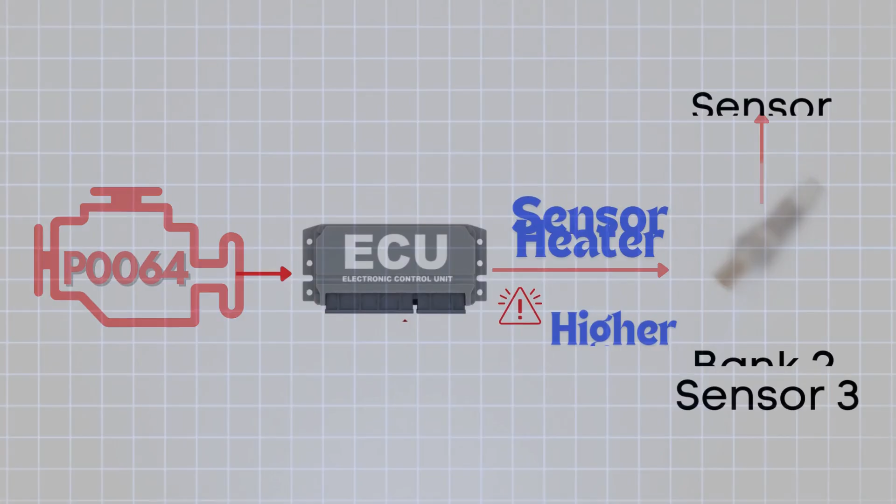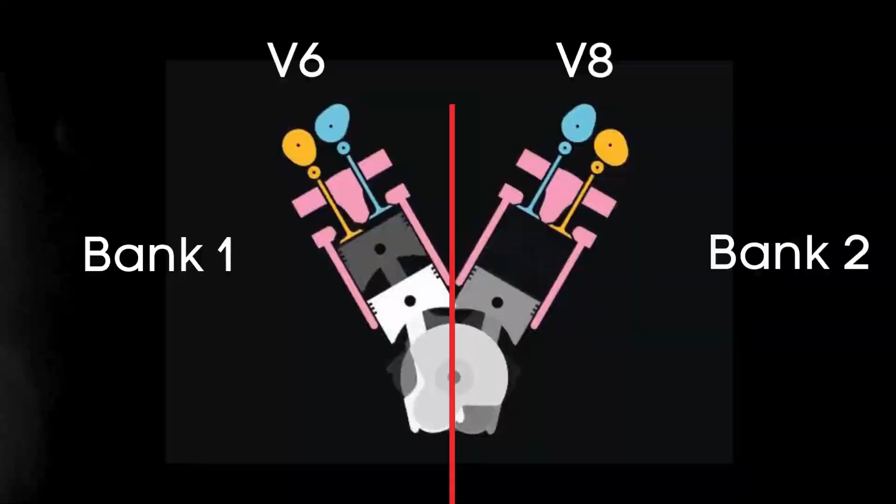Specifically, we're talking about the oxygen sensor heater circuit for Bank 2, Sensor 3. Now let's learn what Bank 2 Sensor 3 is. In engines with multiple cylinder banks, like V6 or V8 engines, you'll have two sides or banks of cylinders. Bank 1 typically refers to the side of the engine where cylinder 1 is located, and Bank 2 is on the opposite side. Each bank has its own exhaust line, and each exhaust line is equipped with its own catalytic converter.

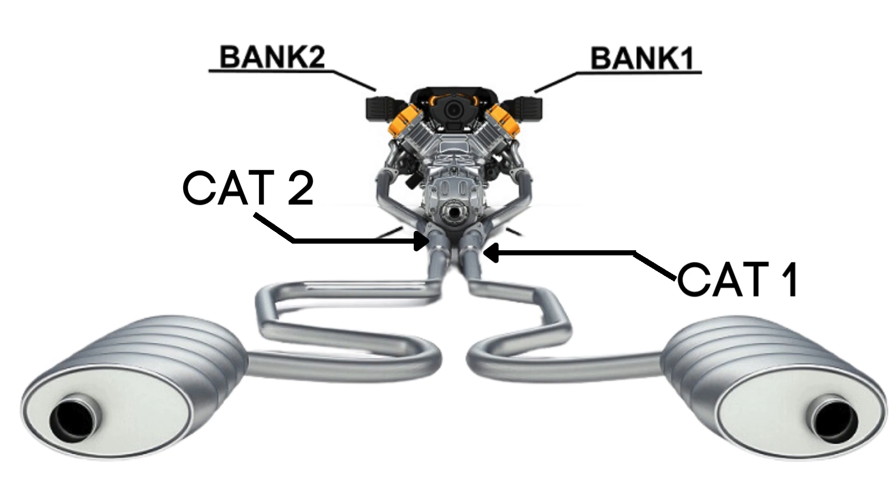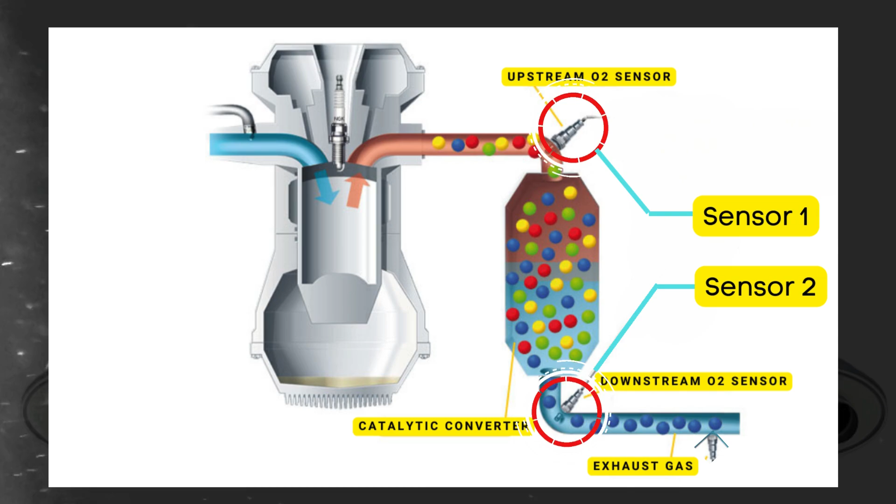Now, here's where the oxygen sensors come in. Each catalytic converter typically has 2 or 3 oxygen sensors. The upstream sensor, which we refer to as Sensor 1, is positioned before the catalytic converter. Then there's the downstream sensor, known as Sensor 2, which is located after the catalytic converter. In some cases, there might even be a third oxygen sensor further downstream, positioned after Sensor 2.

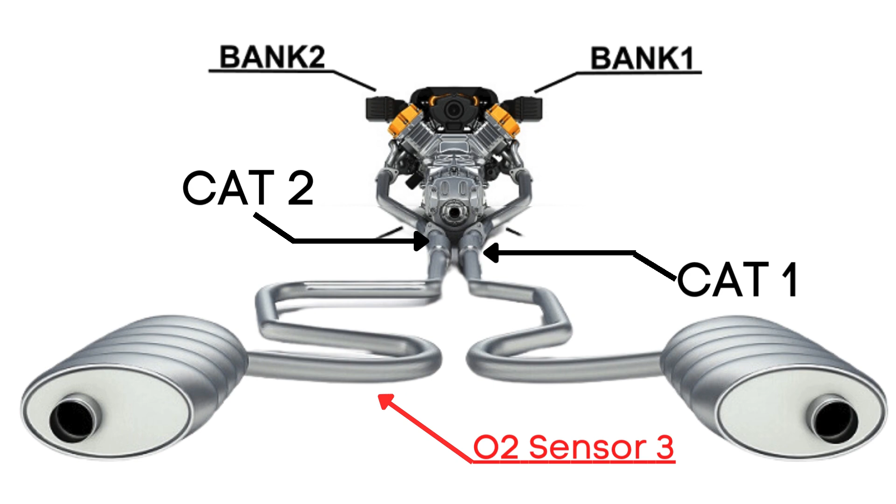So when we talk about Bank 2 Sensor 3, we're focusing on the third oxygen sensor that's downstream from the engine on Bank 2.

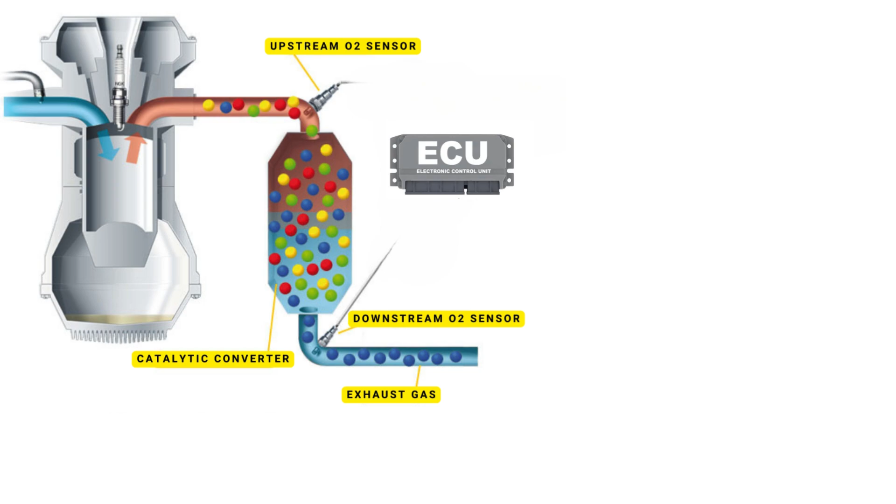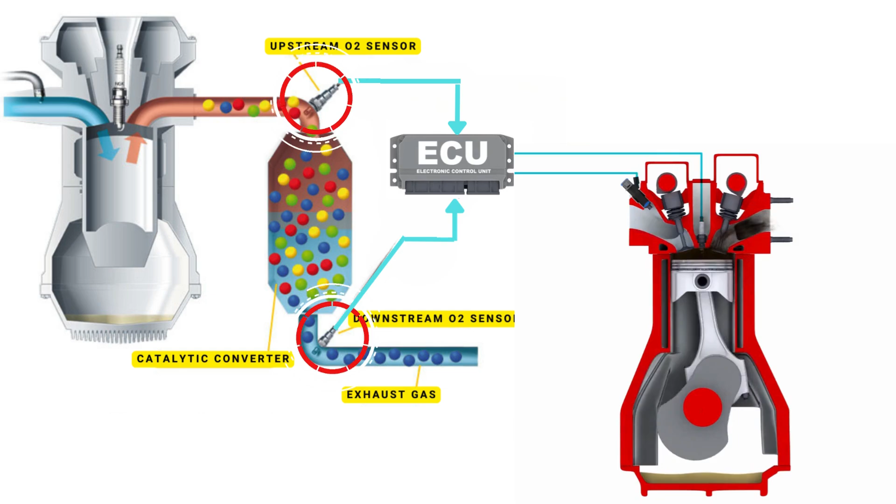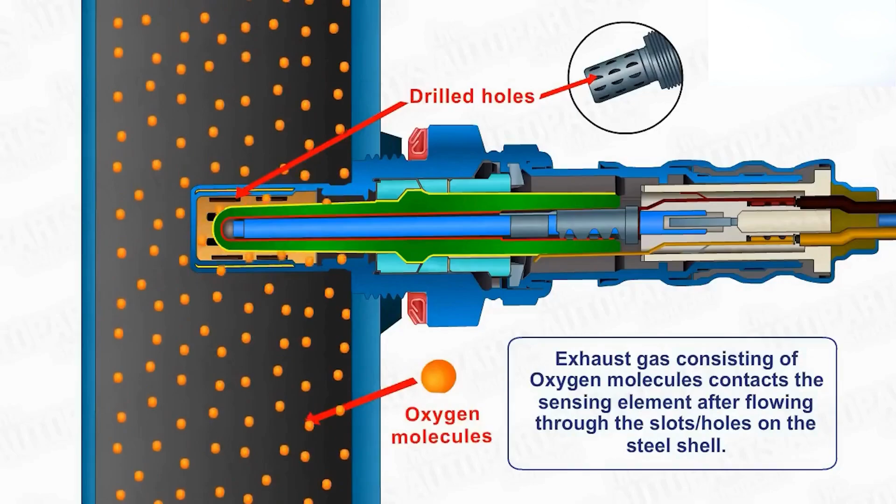But here's the thing. An oxygen sensor won't function correctly until it's heated to a certain temperature, around 600 degrees Fahrenheit for conventional sensors. That's where the heater circuit comes in. It's designed to warm up the sensor quickly, so it starts working sooner.

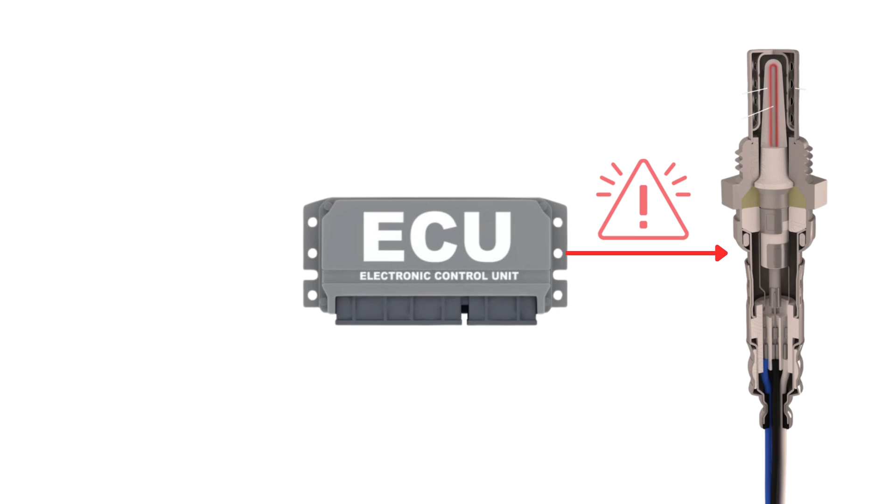The ECU regularly checks the heater circuit in the oxygen sensor to ensure it's functioning correctly. If it finds that the voltage in the heater circuit for Bank 2, Sensor 3 is higher than expected, it will trigger the P0064 code.

Now that we know what P0064 means, let's find out how to fix it. Troubleshooting P0064 involves several steps, and we'll discuss each one in detail.

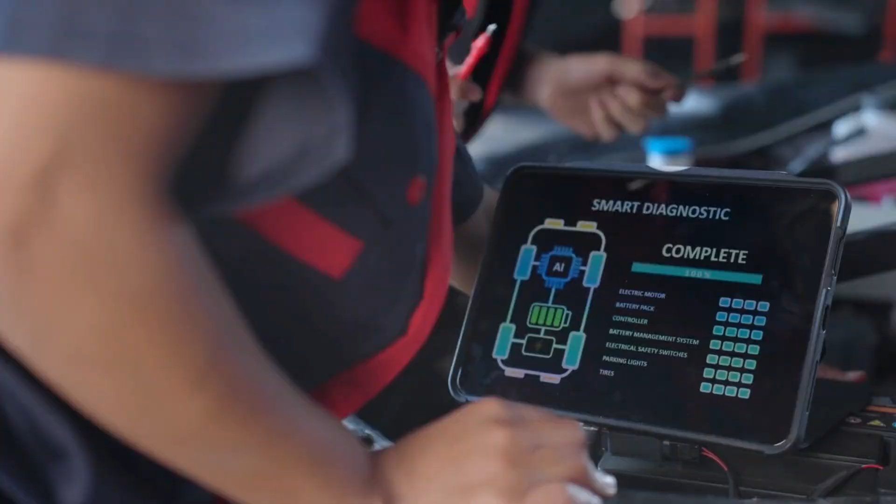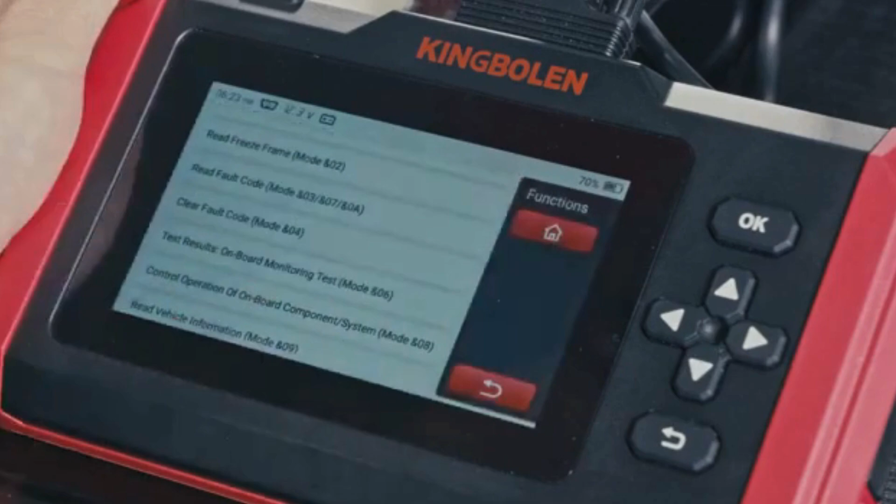Let's get started. Before diving into specific repairs, perform an OBD2 scanner reset to clear the codes. Sometimes these codes pop up due to recent maintenance work and can resolve themselves after a reset. To reset the error codes, use an OBD2 scanner.

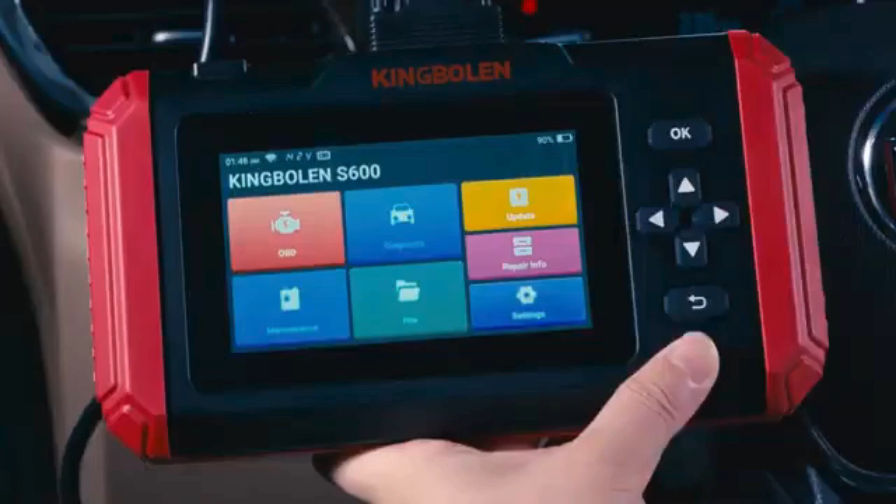Simply connect the scanner to your vehicle, follow the instructions to clear the trouble codes, and see if the P0064 code reappears. Step 1: Start by visually inspecting the heated oxygen sensor.

Carefully examine the sensor itself, along with the wiring and connectors. Look for any signs of physical damage, such as cracks, frayed wires, or loose connections. If the HO2 sensor appears to be damaged, it's best to replace it.

Make sure to get the correct sensor for your car's make and model.

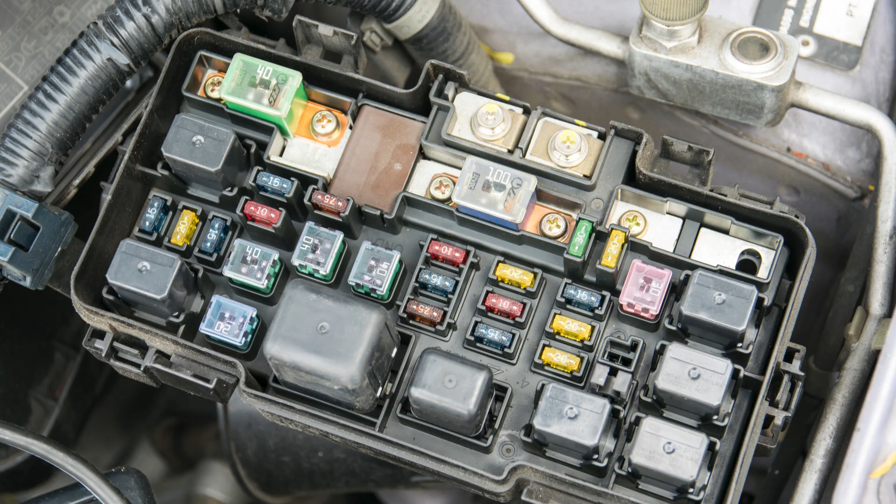Step 2: Check for a blown fuse and broken wires. First, locate your car's fuse box. You'll need to find the specific fuse that controls the oxygen sensor heater circuit. To do that, check the diagram on the back of the fuse box cover. It'll tell you which fuse is the one you're looking for.

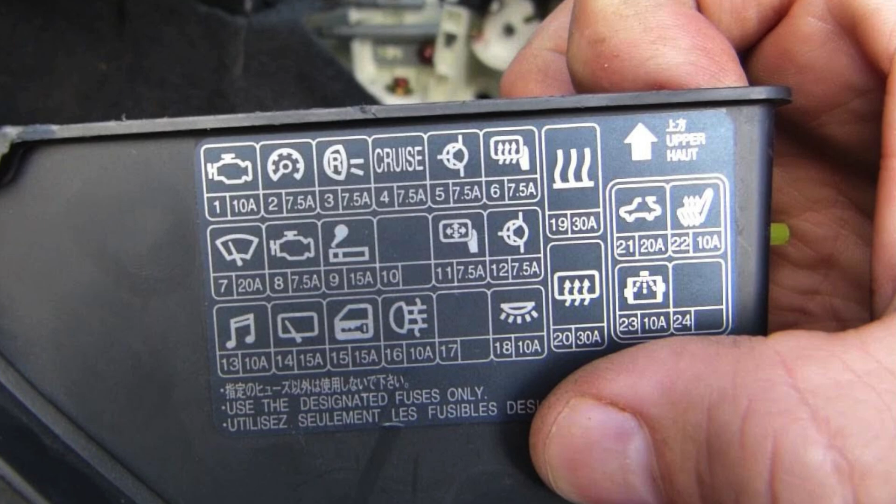Once you've found the fuse, inspect it closely. If the fuse link is broken, it'll need to be replaced. Next, check the wiring around the oxygen sensor. Look for any broken or frayed wires. If you spot any damage, repair the wires and recheck to see if the P0064 code is cleared.

Step 3: Test the oxygen sensor heater. Oxygen sensors typically have 4 wires. 2 of these wires, usually of the same color, are dedicated to the heater circuit within the sensor. Over time, the heater circuit can burn out and stop functioning properly.

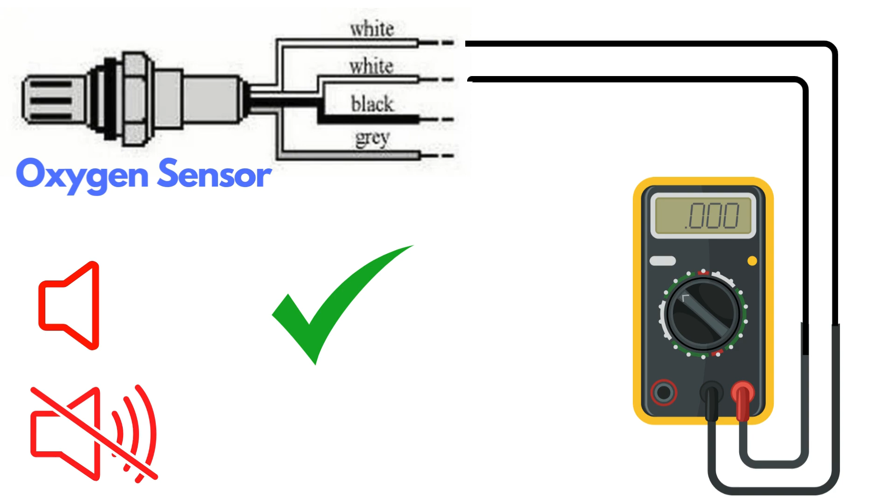To test the heater circuit, you'll need a multimeter. Set the multimeter to check for continuity, then place the probes on the two heater wires. If the circuit has continuity, the multimeter will beep, indicating that the heater is functioning. If there's no beep, it means the heater circuit is broken and you'll need to replace the oxygen sensor.